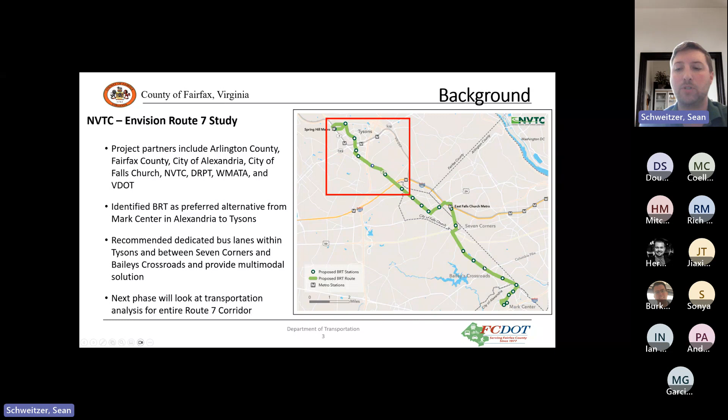Jumping into the background of Fairfax County's Route 7 BRT study and efforts: back in fall of 2018, Fairfax County commenced their Route 7 BRT study. It was to get a better understanding as to how Route 7, or the BRT, would work in the Tysons area. So we looked at 9 preliminary alternatives and narrowed that down to 3 alternatives to be evaluated further.

In the picture to the right, you can see from the Route 7 and I-66 interchange all the way up to International Drive. All 3 of the alternatives we were looking at shared the same corridor or alignment, and then from International Drive is where the three alternatives separated or deviated. Alternative one, represented in blue, continues on International Drive and goes around Spring Hill Road and Tyco Road.

Alternative two, that was the shortest, and it just went up International and terminated at the Tysons Corner Metro Rail Station. Alternative three, which closely resembles the NVTC's Envision Route 7 study, continued on Route 7, going on Tyco Road and then terminating at the West Park Transit Station, and then ultimately coming back down.

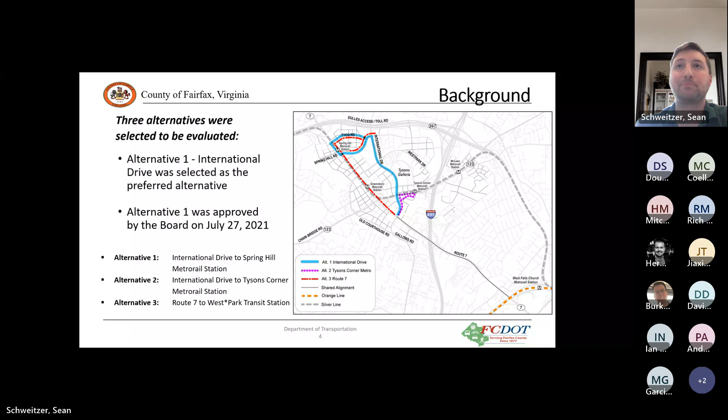Looking more into the Route 7 BRT plan amendment and the preferred alternative that was ultimately endorsed, you can see to the right in this picture the Route 7 BRT operating in mixed traffic here in the West Falls Church area, in the southeast. The termination point for the southern portion would be at the West Falls Church Metro Rail Station, where it would continue on Route 7, take a right from Haycock onto Route 7 westbound, and stop at Chestnut Street and Route 7 right here.

Right past the I-66 interchange, probably around Idylwood and Route 7, the BRT would transition into median running BRT, highlighted in purple. The next stop would be Patterson Drive Station on Route 7, followed by George Marshall Station on Route 7. Then crossing over the Beltway, we get to Fashion Boulevard Station on Route 7.

Turning onto International Drive, still in median running BRT, it would stop at Fletcher Street Station, International Drive, before continuing north to the Greensboro International Station on International Drive. Then Lincoln Station on International is where the BRT would transition from median running BRT into mixed traffic, to make that left on Spring Hill Road.

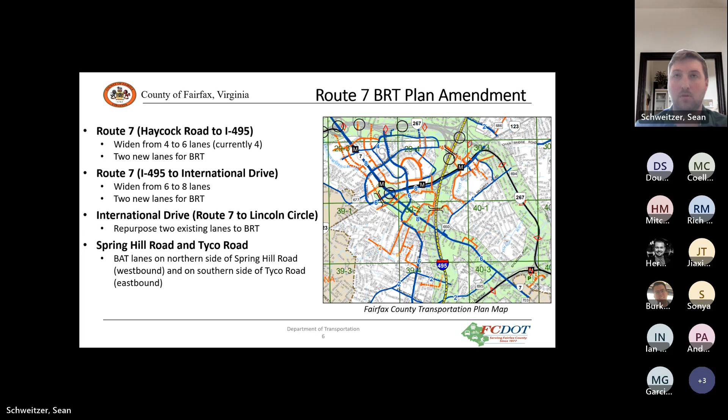Getting into the station locations and configurations, I'll start again in the southeastern portion of West Falls Church area. As the BRT comes down eastbound on Route 7, we are looking at utilizing the Route 7 flyover ramp, depicted in yellow here, so the bus would take the flyover ramp to get direct access to the West Falls Church Metro Rail Station, then getting onto Haycock Road and making a right going westbound on Route 7, stopping at Chestnut Street and Route 7. This would all be in mixed traffic for the West Falls Church area.

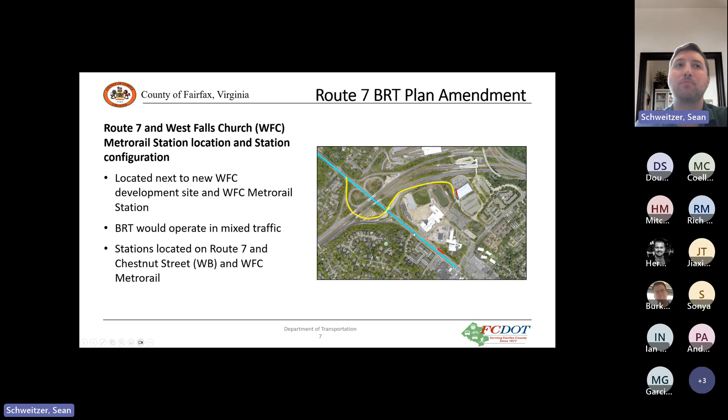The next station would be Route 7 and Patterson Drive Station, where this portion would be in median running BRT. We have the station platforms staggered to help reduce right-of-way impacts to the corridor. To the right you have the Trader Joe's, and to the south you have the Idylwood Shopping Center, so that would be serviced by this station location.

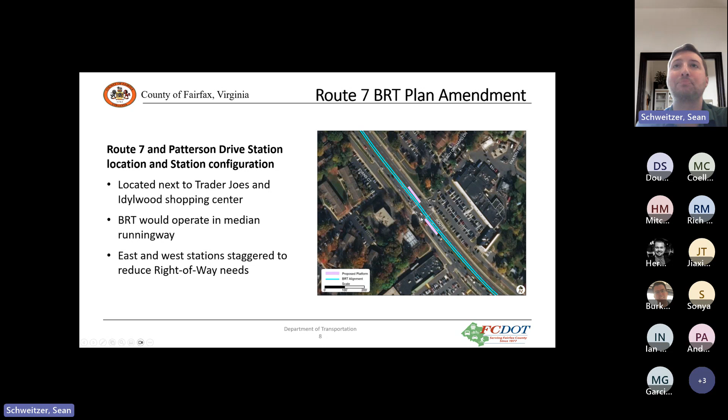Continuing westbound on Route 7, the next station would be Route 7 and George C. Marshall Drive. The BRT operates in median running, exclusive traffic, and the station platforms are staggered to minimize right-of-way needs and impact. This would service George C. Marshall High School.

Crossing over the Beltway going westbound, the next station would be Fashion Boulevard Station and Route 7, as well as the new planned development for townhouses on the northern side. This would service the Tyson's Corner Mall. We're still in median running BRT, and again the station platforms are staggered.

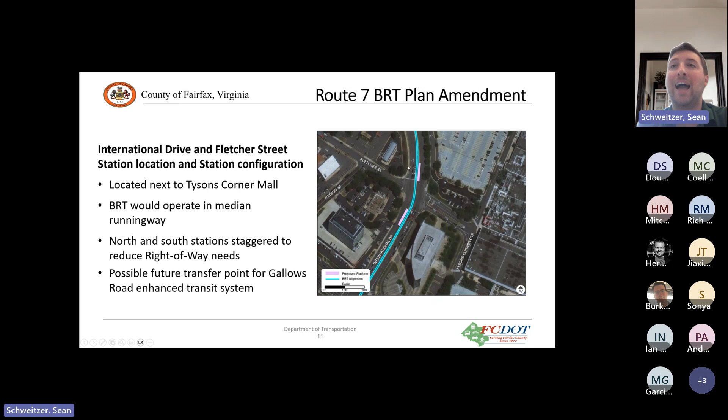Turning onto International Drive in median running BRT, again the station platforms are staggered, and this location would service the Tyson's Corner Mall as well. We're also looking at a possible future transfer point from the Gallows Road Enhanced Transit System, which the county is currently looking at, so this would act as a transfer point as well.

The next station is International Drive and Greensboro Drive Station. This would service the Tysons Galleria Mall. Again, the station platforms are staggered, and the BRT is operating in median running BRT right here.

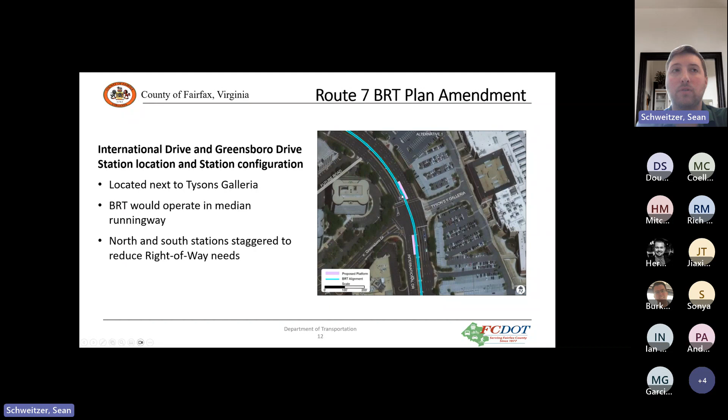The next station is International Drive and Lincoln Circle. It's in median running BRT, and the station platforms are staggered. This station location would service the Rotunda condominiums and other condo apartments around the area to the right. This is where the station acts as a transition point from median running to mixed traffic, to help the BRT take that left at Spring Hill Road.

The last station, the termination point in the northern part of the corridor, is Spring Hill Metro Rail Station. As the bus comes along Spring Hill Road in BAT lanes, the BRT would stop at the existing infrastructure currently there for local bus services at the Spring Hill Metro Rail Station, which would be the termination point for the BRT.

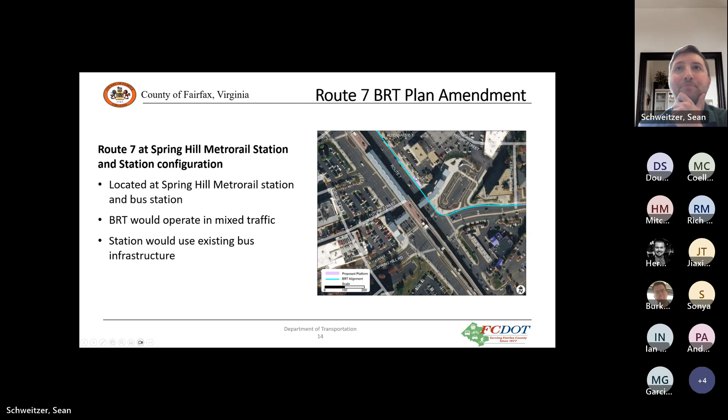Recapping the proposed changes the county is recommending for the Route 7 BRT plan amendment: the segments we're looking at for two exclusive lanes for BRT would be Route 7, converting two planned lanes from general purpose to BRT. On International, we would convert two existing general purpose lanes to exclusive median running BRT. All other segments along the corridor would be in BAT lanes, or business access and transit lanes, or in mixed traffic.

We will also be looking to recommend defining the BRT route from West Falls Church Station to Tysons along Route 7 and International Drive, and then also recommending to put in the potential station locations along the BRT corridor.

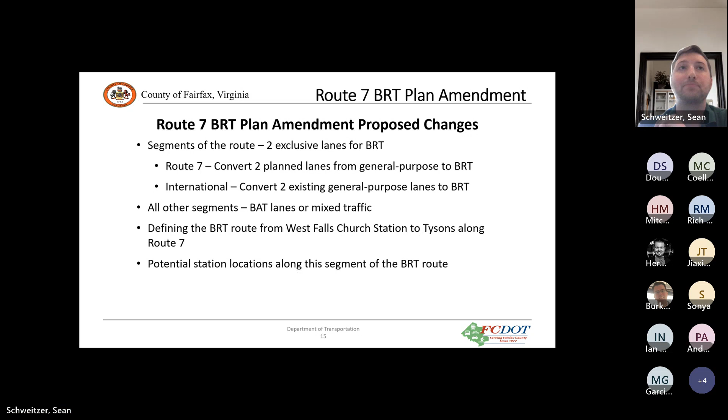Getting into some of the community engagement we've previously done and are currently doing: back in March of 2020, we held a public meeting at George C. Marshall High School. This was at the beginning of the Route 7 BRT study, where we looked at different alternatives. We came to the public to get feedback on the measures of effectiveness used to compare the alternatives we were considering, and to get general feedback on what the community was thinking for alignment, ultimately incorporating that information into our study.

We reached back out to the community in March of 2021, when we had the three alternatives analysis completed. We presented those alternatives to the public and garnered feedback through a survey of the three different routes, as well as the proposed station locations, and ultimately came to pick the preferred alignment, which was alternative 1 along International Drive.

Now we're currently coming to the public to inform them on the Route 7 BRT plan amendment and explain the proposed changes we're recommending for the comprehensive plan moving forward. We also have another meeting with the same presentation I'm conducting right now, tomorrow evening at 6:30.

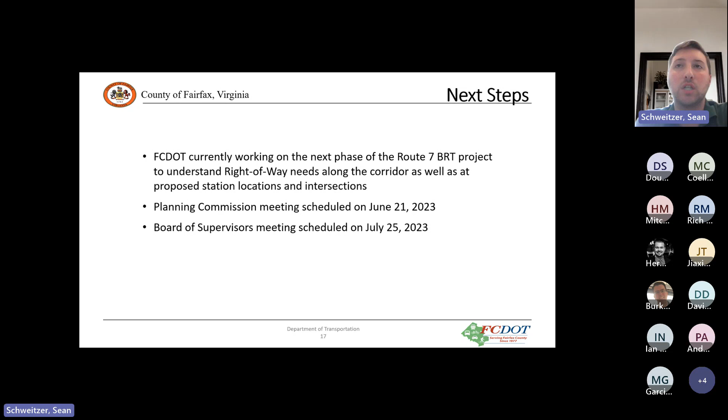Switching back to the Route 7 BRT plan amendment, we are planning to take this plan amendment to the Planning Commission June 21st of this year, and then ultimately to the Board of Supervisors in July of this year, July 25th.

And so now I will open it up to any comments or questions anyone might have regarding the Route 7 BRT plan amendment.

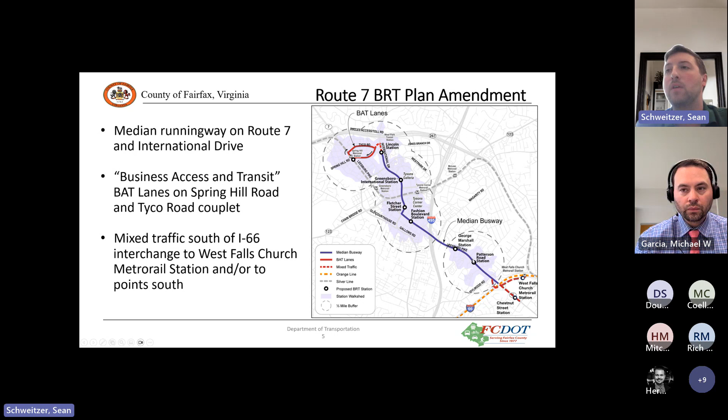So we're looking at different interim alternatives to see how we can close or complete this system in the northern portion. We are planning to take this and include it in the plan amendment in order to have this portion self-sufficient. So I don't know if that answered the question.

I believe it did. We added it as part of the plan amendment, the terminus in the West Falls Church Station area, because that's the perfect place to terminate and move the bus around to turn it back north again.

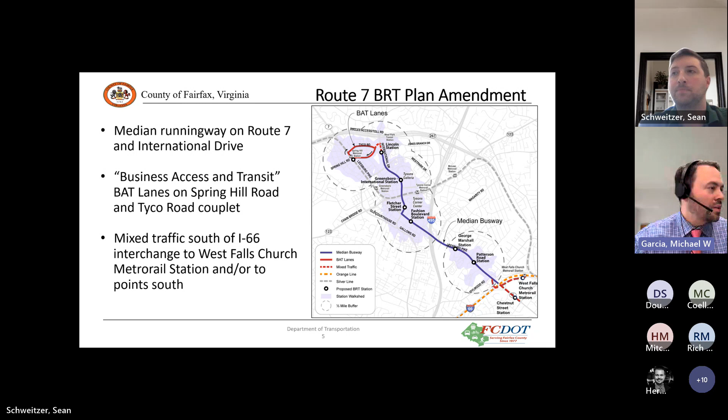So I'll answer this question: will those townhomes at the slide 9 example be permitted to reduce parking requirements because of the BRT line? The first part of that question is no, they won't be able to reduce the parking requirements if they are tied to an approval of a site plan or a zoning application—they still have to adhere to that. They can come in and file a parking reduction plan with the county if they would like to reduce their parking requirement, so that is something they can do.

The next part of that question is, in general, will places be able to reduce the required parking mandates to make it easier to be close to the bus stations? Yes, they can file parking reductions, and we would anticipate and expect for them to do that because they are in close proximity to a transit line, and the county would encourage them to reduce parking to take advantage of the transit system being provided nearby. We definitely encourage that for any future applications that want to modernize themselves and reduce parking because they're oversupplied.

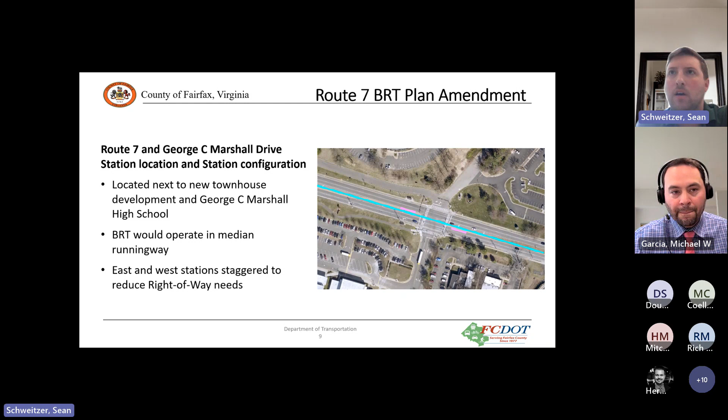The next question, Sean, is about the station they missed - the one after the Route 7 and George C. Marshall Drive station. What was that location again? It's the Fashion Boulevard and Route 7 station, westbound, after the Beltway.

Also, there's a handy map on the project website, where you all gained access to join the meeting. It shows each station and labels them nice and bold, so if you want to remember them later, that's a good place to get them from.

The next question is: I see that there are future streets planned. Is there coordination between the land use and zoning and this transit plan? I'll stop there.

We looked at the land use forecasts when we were doing the Route 7 BRT study to understand where future land use projects would be, and where the demographics and employment areas would be. We looked at them and took that information to help steer us on the proposed station locations. We'll probably look further as more information comes online and things change, especially with the pandemic, which changed a lot of things. But the way we came to pick these proposed station locations was through demographics and future land use forecasts.

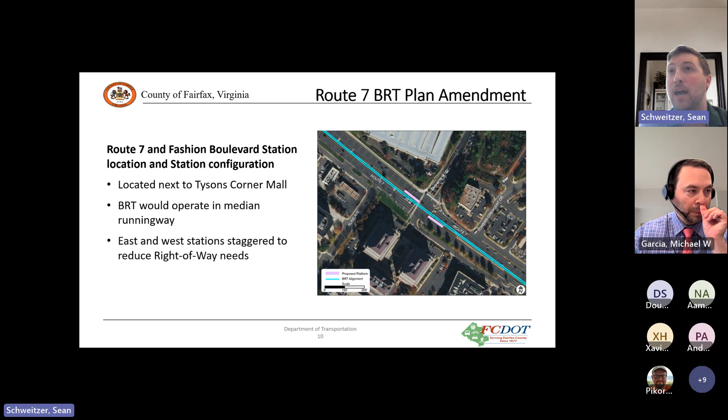So we are taking that into consideration in this next effort, and hoping to look at slip rights along the corridor as well, which are a safety issue with bikers and pedestrians. So we're looking in this next effort to see where we can incorporate those mitigations and remedy them as we move forward. We are currently looking at that and bike ped facilities.